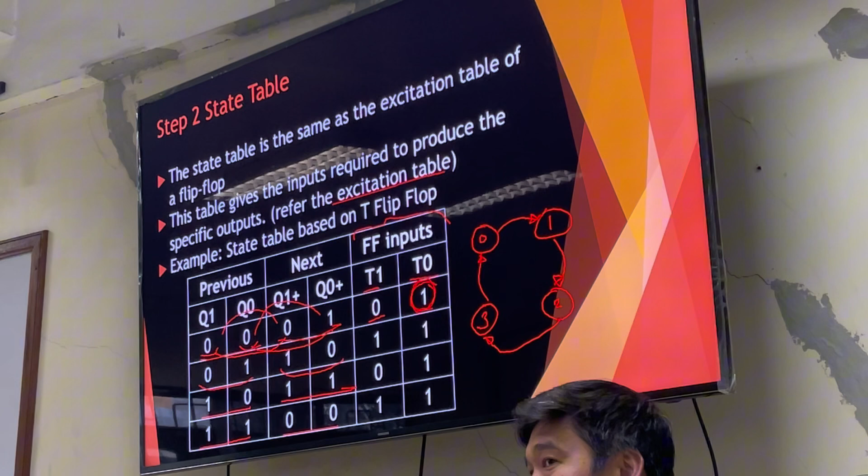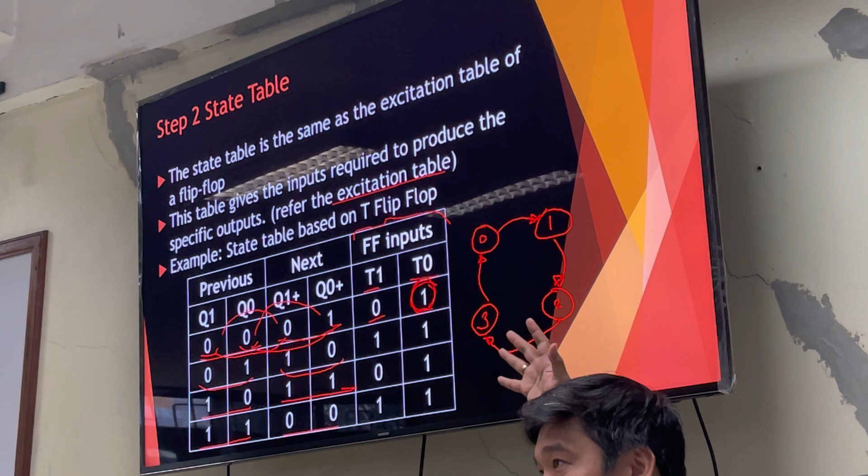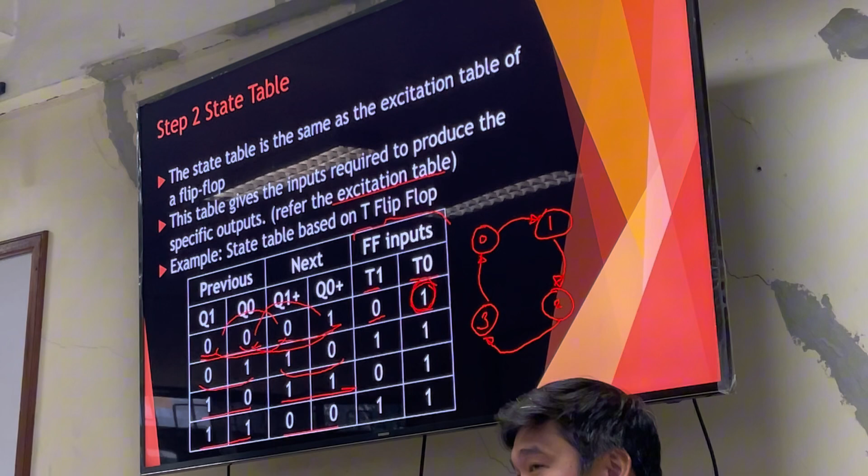That's undefined. Okay, so in a T flip-flop, you only have 2 states, which is hold or toggle. Since there's only one input, it's either 0 for T, which is hold, or 1 for T, for toggle.

So you'll notice here, every time your previous and next state change, the T input is indeed 1, representing the toggle operation. But for those states where there's no change, the T input is 0, meaning hold. But here from 0 to 1 is toggle, 1 to 0 is toggle.

Okay, so initially in step 2, which shows the state table, it also shows the excitation table - the needed input to the flip-flop to achieve the next state from the previous state.

So this is where we based all of this - we based it all here on the characteristic table.

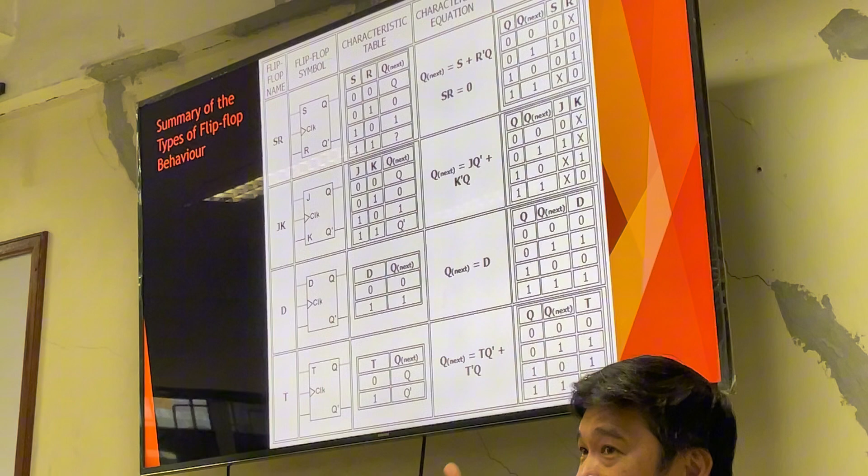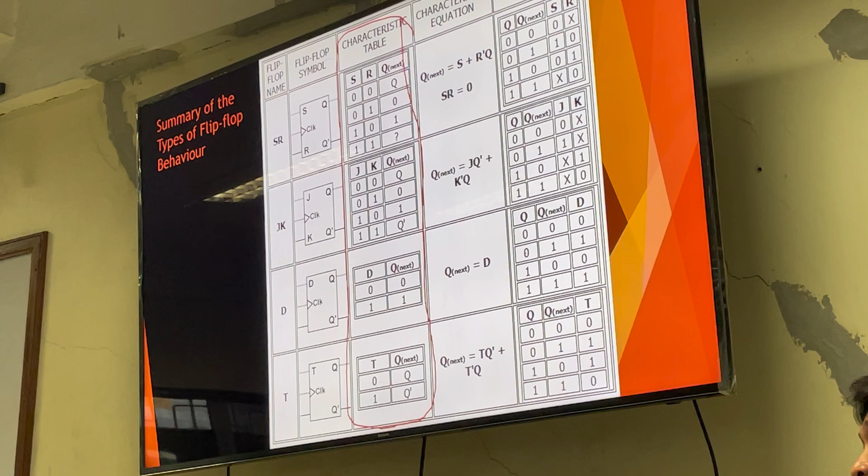Okay, so that means you just memorize it, sir. Daily, so you can use index cards, sir. Daily, you should understand this. You only need to remember the characteristic table, guys, which we already covered last year when discussing flip-flops. The difference between flip-flops and latches is that a flip-flop requires a clock, while latches do not require a clock.

However, if you have a so-called RS flip-flop, it is not as simple as an implementation using a NAND gate or NOR gate. It's either implemented with the help of an edge-triggering circuit or using the master-slave concept to implement this so-called RS flip-flop.

So again, the characteristic table is basically the relationship between the input and output of your flip-flop. We see S and R here. If 0,0, the next output is Q. If 0,1, the next output is 0, meaning it's reset. If 1,0, it's set. And for 1,1, it's a question mark, so that is undefined - an input that should not happen in an RS flip-flop.

You can figure that out. So for JK, 0,0 gives Q again - that's hold, meaning no change, whatever the previous output was becomes Q next. For J,K equals 0,1 the output is 0, for 1,0 the output is 1, which is set, then for 1,1 you get Q complement, meaning toggle - if Q was the previous state, Q next would be its complement.

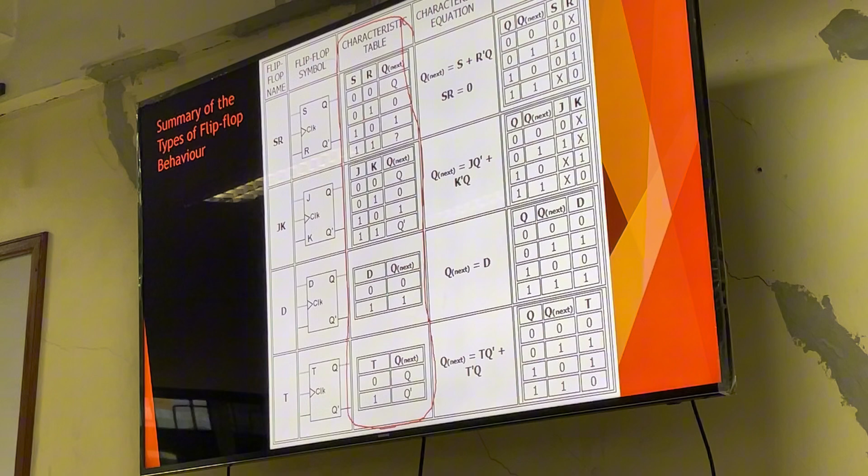For the D flip-flop, it's the simplest - whatever input you give to D, that becomes your output Q. Then you have the T flip-flop: if T is 0, Q holds; if T is 1, you get Q complement, meaning toggle. These are what you really need to remember and memorize, guys. Once you understand or memorize the characteristic table, the rest can be derived.

So let's take an example: the excitation table for the T flip-flop. As basis for the input, we have Q and Q next. Since there are two variables involved, it will generate 4 possible combinations: 0,0, 0,1, 1,0, and 1,1 for Q and Q next.

Now for the excitation table, we determine what input T should have to arrive from this previous output to the next output. If the previous is 0 and the next is 0, that means hold. If 0 to 1, that means toggle. The same is true for 1 to 0 - toggle. And 1 to 1 is hold.

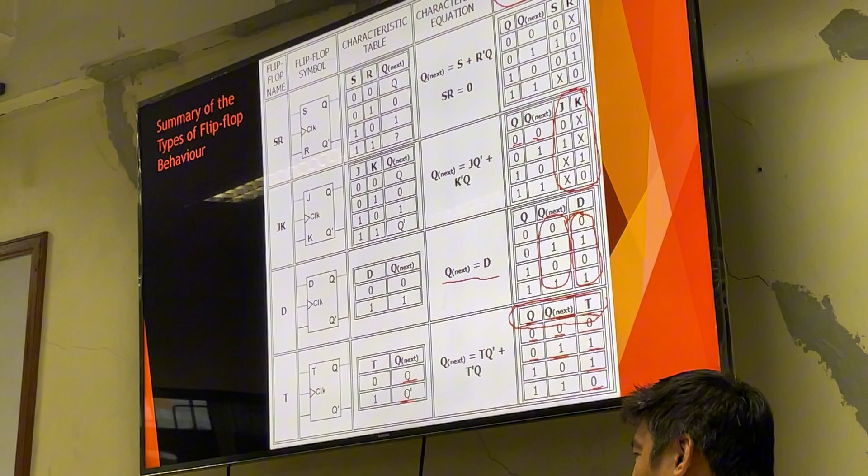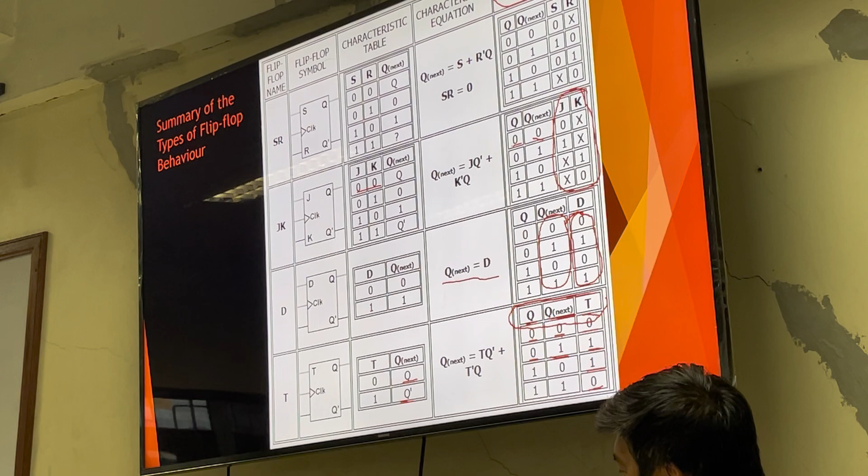If you look at it, if your previous output is 0 and the next output is 0, what state is that in the JK flip-flop? That's hold - what is hold? 0 to 0. What other possible state in the JK flip-flop gives an output that stays at 0 from 0? For 0,1: what is this? This is reset. J is 0, K is 1, output is 0 - that is reset, meaning the input is 0,1.

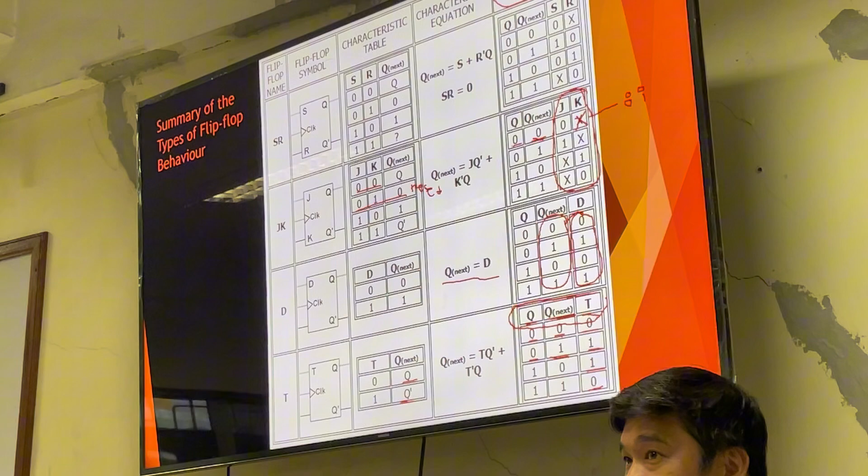From 0 it becomes 1 - so what is the state? Either J is 1 and K is 0, or J is 1 and K is 1 - that's toggle. When your output goes from 0 to 1, there are two possibilities for the input fed: it's either set or toggle.

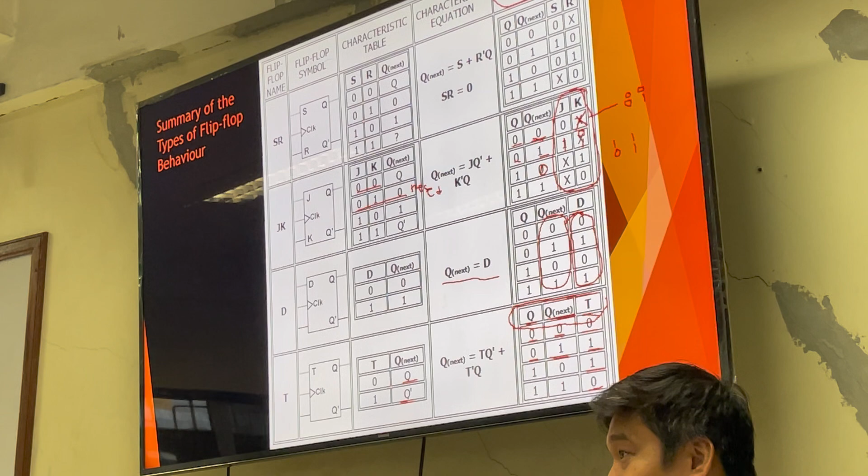So how about 1,0? For 1 to 0, again it could be 1,1 which is toggle, or 0,1 meaning reset. And finally, for 1,1, it could either be 0,0 or set which is 1,0 - so the x is 0.

So again, that excitation table is something you can simply derive from the characteristic table. You should really understand, guys, the different kinds of flip-flops, like the JK, the T, the D, and the SR flip-flops.

Next, we have the SR flip-flop. If we look at the SR flip-flop, guys, how do we relate it to the type of latch, based on our input - who can set or who can reset - is that a NOR latch or a NAND latch?

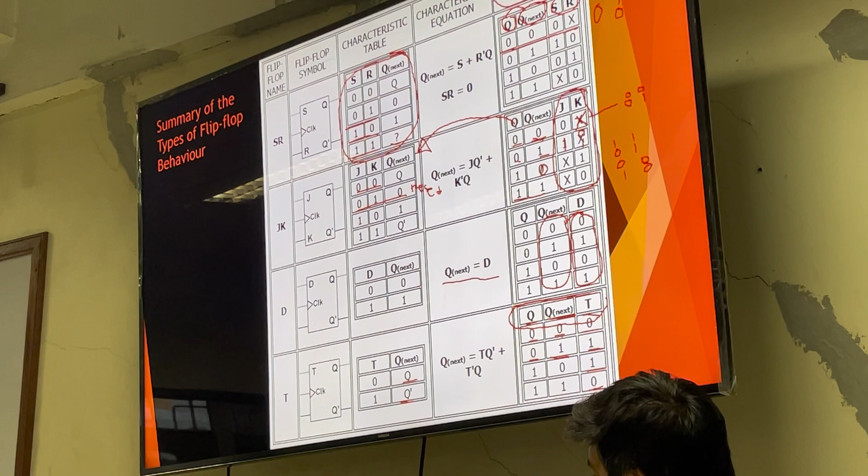Take note, guys, from the word excitation table - what input should be fed to S or R for you to be able to get the next output from the previous output. What can excite it, what can trigger the input. This is very useful when you will be designing the sequential circuit.

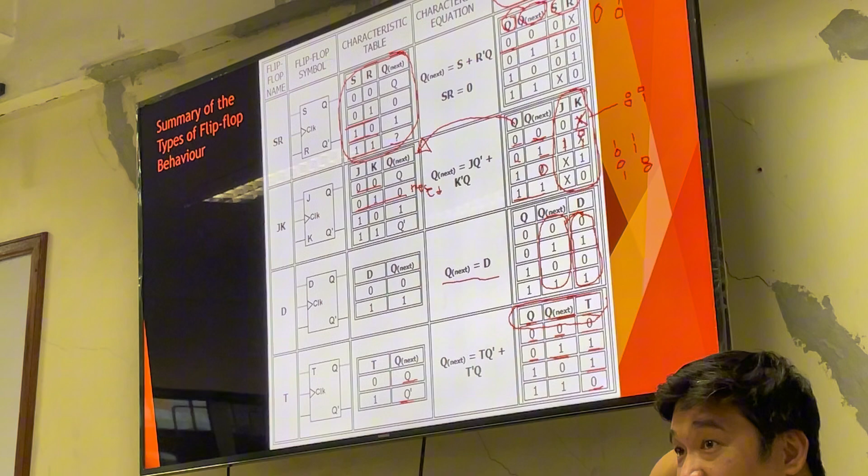Posible, I can ask you to generate prime numbers. The counting will be prime numbers, which is good for, let's say, 4-bit prime numbers. So what is a prime number? 1, 2, 3, 7 - a number which is?

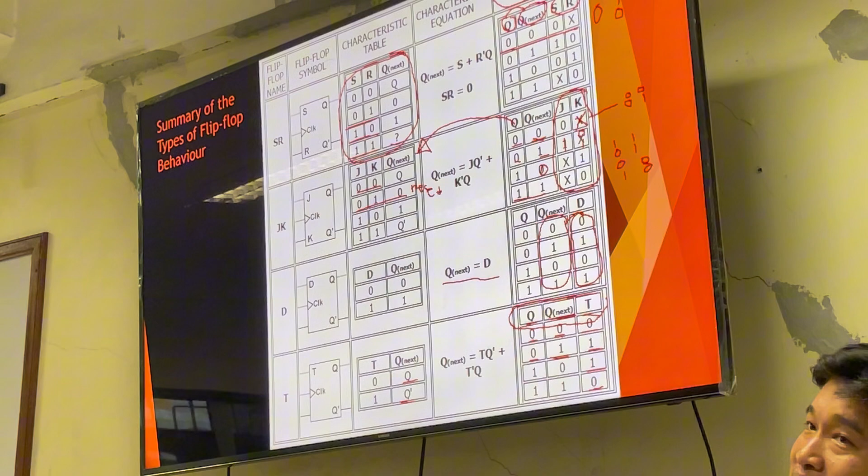The number itself and 1. Is 1 a prime number? So 1 is not a prime number. So there are numbers divisible by itself: 2, 3, 5, 7, 11.

13, 17. Is that still 4-bit? Ay, wala na. So only up to 13. So those are the prime numbers.

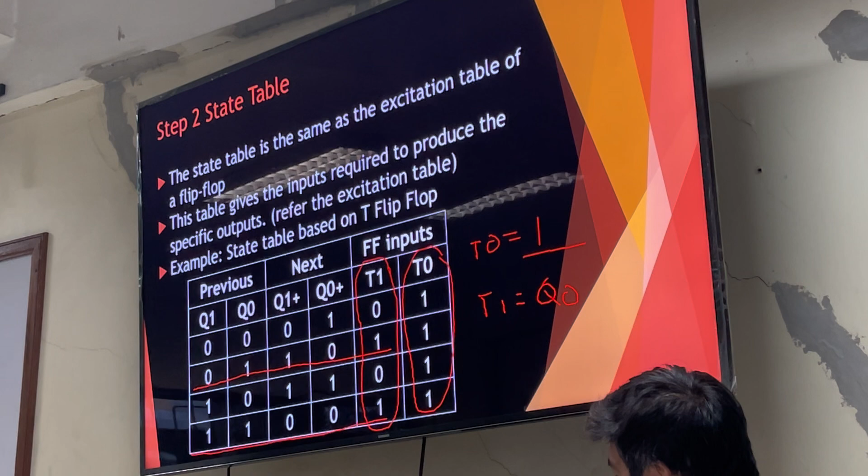So once you have performed K-mapping to simplify the circuit that will be connected to T1 and T0, then you build the circuit.

So here it is, this is your T0, connected to high. And this is T1, connected to Q0. And again, this is our classic example of a synchronous 2-bit counter using T flip-flop.

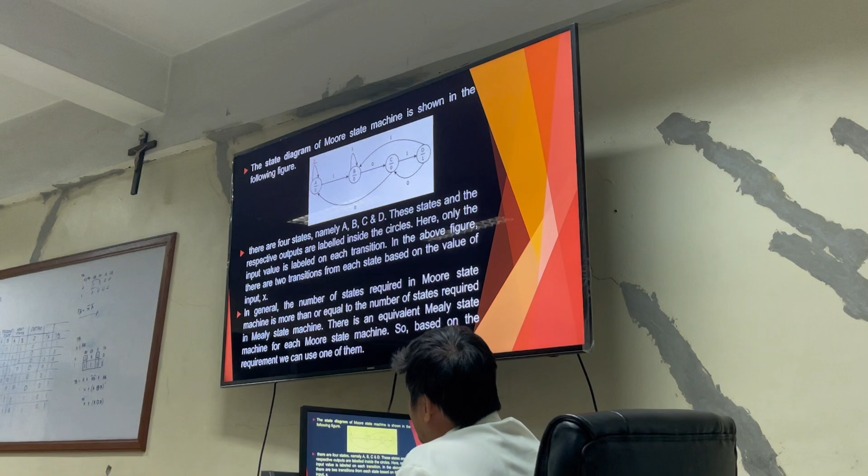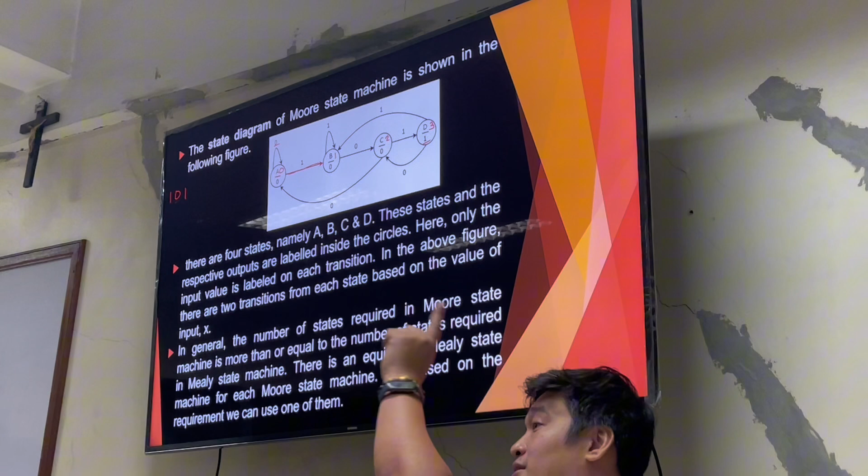Now what you see here is an example of a sequence detector. Where does it go? It goes to B. Once you input a 0, then you go to C. As you can see, it detects when it has seen a 1, then a 0. The moment you input a 1, at this point it generates a high, indicating that you have actually detected a sequence of 1, 0, 1.